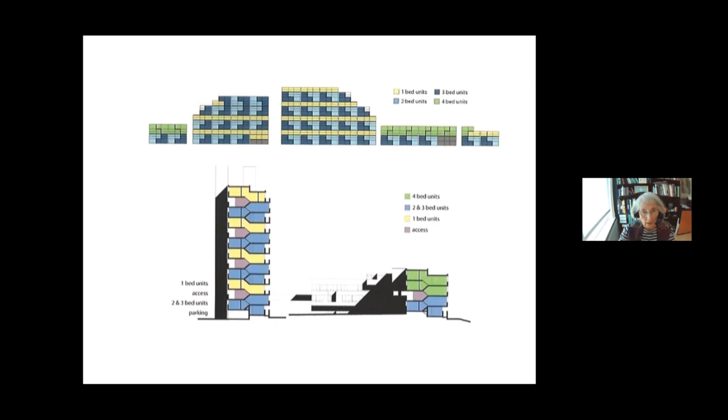And in the section, you'll see that the parking is tucked away half a level down from the lowest habitable floor. All dwellings are to Parker Morris space standards, which was brought in under the Macmillan government, and all the living rooms, except for the flipped around tails, are facing south, and they all have at least one balcony, some have two. In all cases, the living room is half a flight distant from the front door.

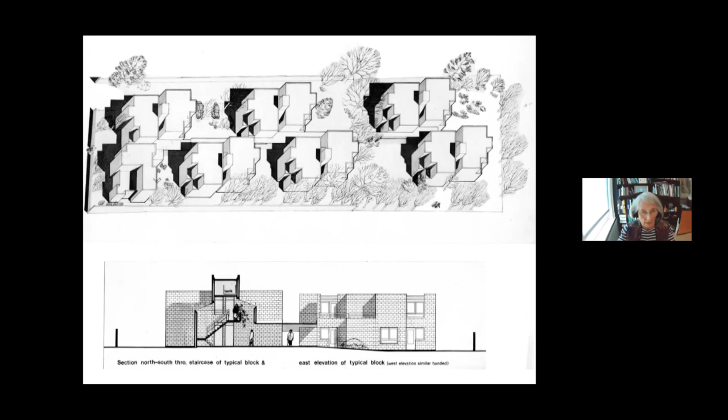The covered way is not completely linear, but does a joggle at every point where it intersects with the entrance, the communal entrance to one of the cluster blocks.

And at that point, next slide, it doubles in width. The point being that if a resident happens to meet a neighbor and want to linger for a chat at their entrance, they can do so quite comfortably without obstructing the passage of other residents who may be wishing to head for the common room.

Next slide. This communal lobby here is naturally lit with roof lights to north and south, and the threshold condition is slightly more generous than minimal to allow for some personalization if people wish to do that.

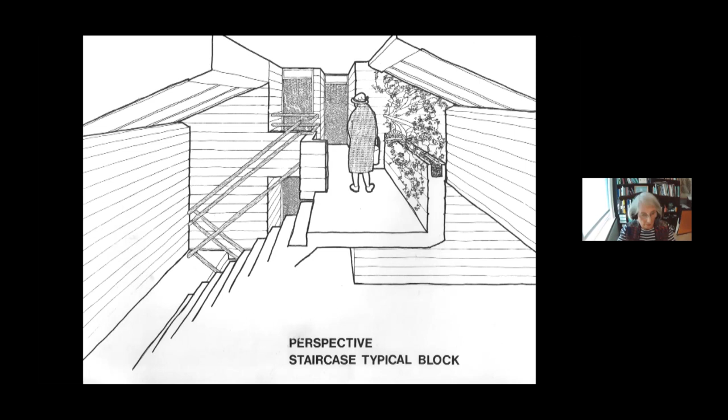Next slide. The verdure of the gardens was very much appreciated by the residents, not just for themselves, but if grandchildren in particular come to visit, there's plenty of opportunity for them to run around and play without annoying other residents who may be trying to take a nap. And I set out the buildings from the trees to ensure that no single tree had to be taken down.

This shot was taken shortly after handover. Next slide, please. The private or semi-private open spaces are also very well used and very well appreciated, as you see here. At first floor level, they're completely private; at ground floor level, they're semi-private because of the setbacks.

So after moving out of London to the counties, I'd rather lost touch with my London work, and was surprised to get a phone call in 2013 from the daughter of one of the residents, seeking my advice because her mother, together with all the other residents, had received a notification from Lambeth of their intention to move all the tenants out. They couldn't give them any indication where they would be moved to.

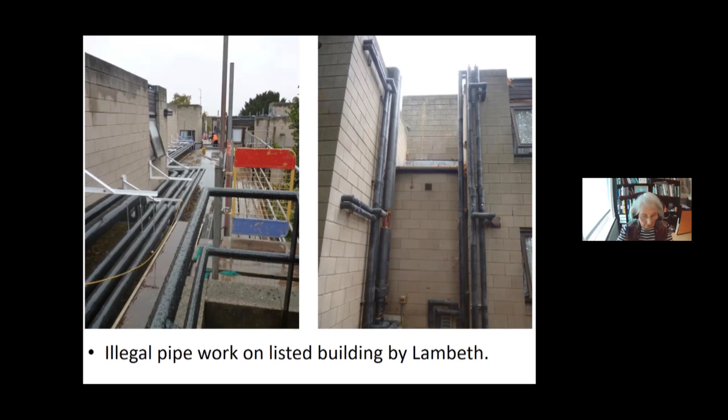Of course, the urge to completely demolish and rebuild rather than going for retrofit, which is what is required from the point of view of sustainability, is in very large measure driven by the asymmetrical application of VAT at 20% to retrofit, whereas new build housing is 0 rated for VAT. And this is an incentive that needs to be removed.

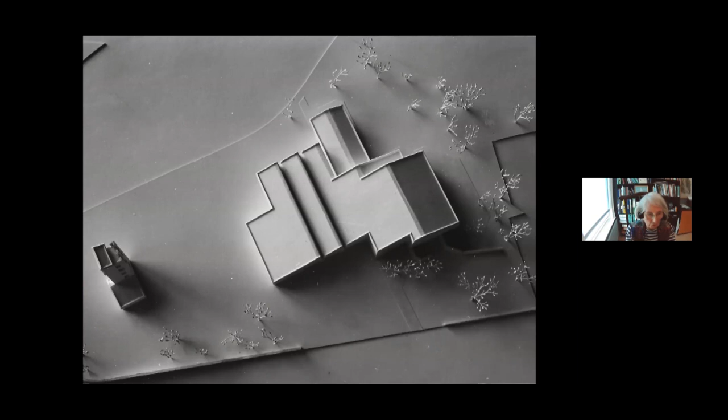Next slide. Very much in sympathy with the values of Kevin Lynch in his book The Image of the City, that landmarks are very much of great importance in giving legibility and structure and identity to places. So when every fire station has to have a drill tower, and it's not often that architects these days get a chance to build a tower - I'm setting aside the gross overblown variety that you see in the City of London - I determined that my drill tower would be a little more interesting than the absolute minimal standard functional tower that the regulations require. Next slide.

The aesthetic problem of fire stations, which I set myself out to solve, is one of how to unify two disparate scales. You have what normally fetches up as a two-story quasi-domestic administrative building, and jammed up against that is often a totally foreign body, a 1.5 story industrial shed, the big garage for the appliances. My solution was to wrap the whole thing down to somewhere between first floor and door height level with an envelope of zinc, a fairly robust material which also reacts favorably to a saline climate.

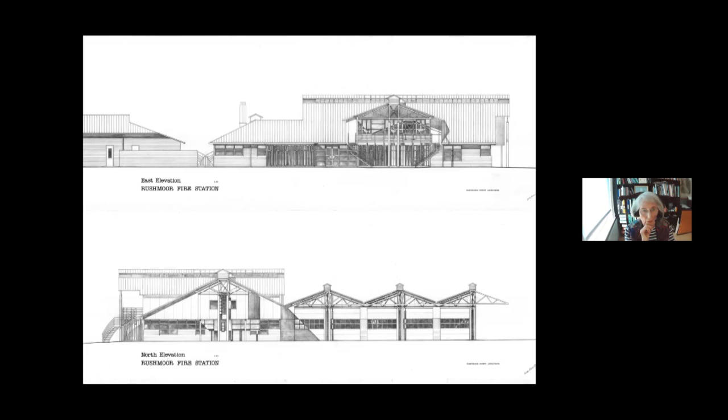Once again, I was preoccupied with how to unify the different scales. This time I resorted to expressing the structure with a family of structures of similar design, with two pairs of lattice girders going straight across. In the case of the appliance bay, this means the covered wash at the rear of the garages is cantilevered, with no columns that a tired driver might crash into on returning from a call out. Then there are cantilevers coming off those main trusses, and a similar language for the residential stroke administrative building.

Here you see the newly finished facade onto the street, where you can see the ground floor of the two-story part. There were offices at that time for fire prevention control, which the fire brigades across the country offered for free, mainly to architects, of course. And all of that facility was withdrawn under Thatcher and the bonfire of the regulations, which has led, I'm sure, to some very real fires.

The upper floor of the two-story part is all steel framed, which means there can be some flexibility in moving accommodation around, which might be necessary since they're now recruiting women to be firefighters, which would mean they need an additional dormitory.

I decided to celebrate the pole drop, which is at the center of the cruciform structure, and that descends into the so-called muster bay, where the kits for retained firemen are located, and the firemen then shoot out into the appliance bay, and off they go. They pride themselves on a 3-minute turnout from sleeping rest to being on the road, and I thoroughly believe that they achieve that.

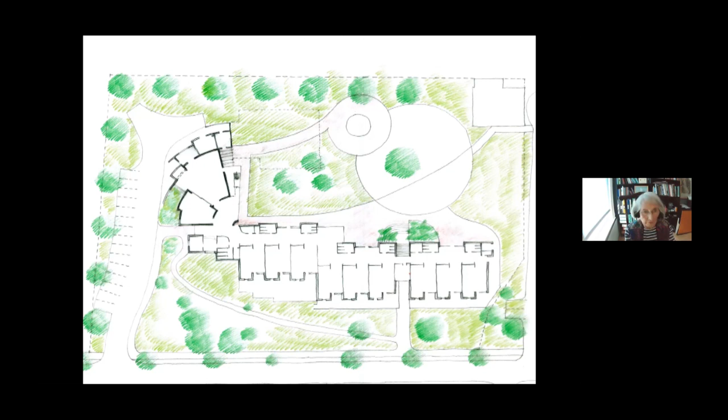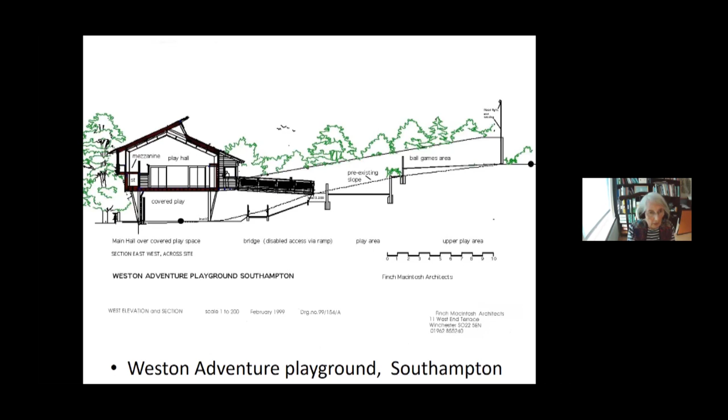Next slide. By this time we'd educated ourselves somewhat in the necessity to use more sustainable modes of construction. So we opted for mainly timber building, although there is some steel involved, and the whole of the cladding is in green oak. This was a computer generated image to impress the planners, which I'm glad to say the finished building completely corresponded with.